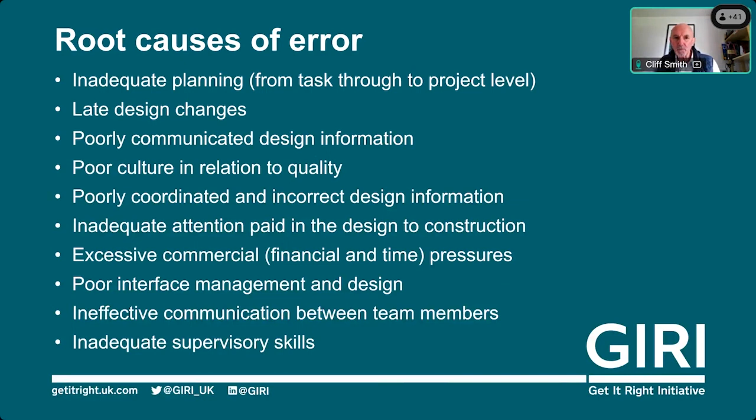GIRI was established following the original research as a not-for-profit membership-based organisation with the strategic aim of improving industry productivity through the elimination of error, and we became a limited company in 2017. The research demonstrated the link between error elimination and productivity, and this helped to convince businesses in the industry as to the benefits of investing in a zero-error program.

But the world is changing, and boardrooms are now recognising the broader range of imperatives they need to satisfy, including safety, sustainability and quality. An error-free strategy provides a platform for achieving all these objectives, and our strategic aim now reflects this.

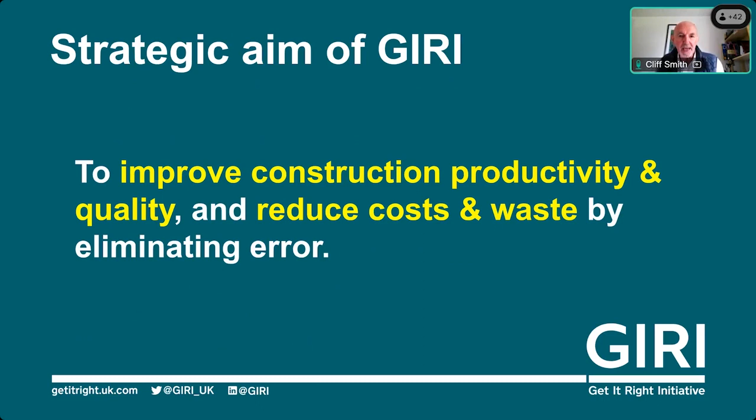So let's take a quick look at how GIRI is going about seeking to achieve its objective and the many benefits that such an approach brings. We have our thought leadership through training, campaigns such as our framework, and forums and webinars such as this. And then in terms of knowledge sharing, we have our research, much of which you'll find on our website, both in terms of design and technology. We are very active on social media, and we provide networking opportunities for our members through 4 meetings in London, usually per annum.

So what are the benefits? Well, productivity certainly is a big gain if you're not wasting time and money. Safety - research in Australia found that 37% of accidents occur during rework. So if you're not making errors, you've got a safer site. And in terms of sustainability, if we're not wasting, as I said before, then our carbon footprint is going to be better. I think the quality benefits are manifest if you get it right first time. And in terms of predictability, if we are not wasting that time, money, and effort, then our outcomes are more predictable. And overall, both as organisations, companies, and the industry as a whole will have a better reputation.

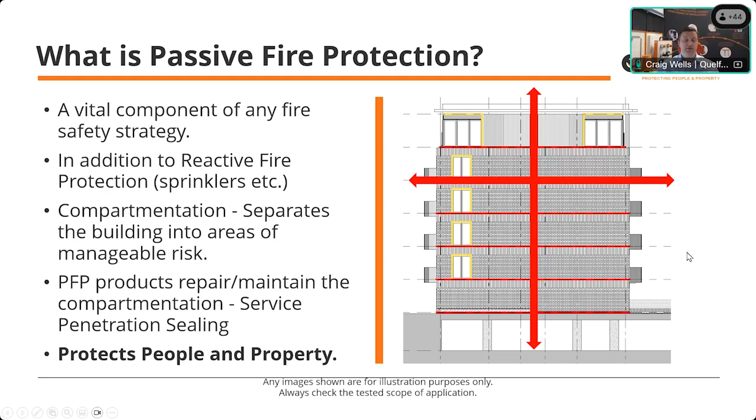So what we're talking about is really compartmentalizing the building and breaking the area down into areas of manageable risk. But of course, in order for that building to function, you're going to have necessary weaknesses within the compartmentation. By weaknesses, we mean things like windows, doors, but in the context of today, service penetration seals - so pipes, cables, and so on - necessary for the building to function, but ultimately breaching the compartmentation.

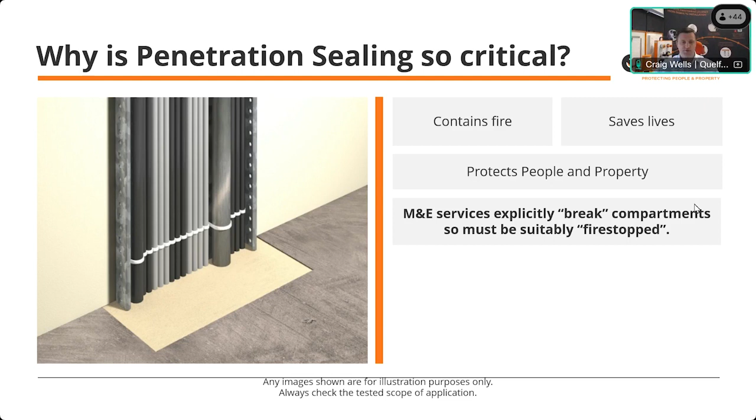So need to be suitably fire stopped. I'm not going to go through lots of pictures of how to get it wrong - we can go to social media for that. I'm going to touch on a couple of examples just to set the context. But this is very much about how you move forward from today, how you can get it right, and it does require, as we've said, a cultural change or a behaviour shift.

So a real reminder, really, that fires do happen. Let us not think that it won't happen, that it doesn't happen to us. Fires do happen, and we've had lots of high-profile cases in recent years.

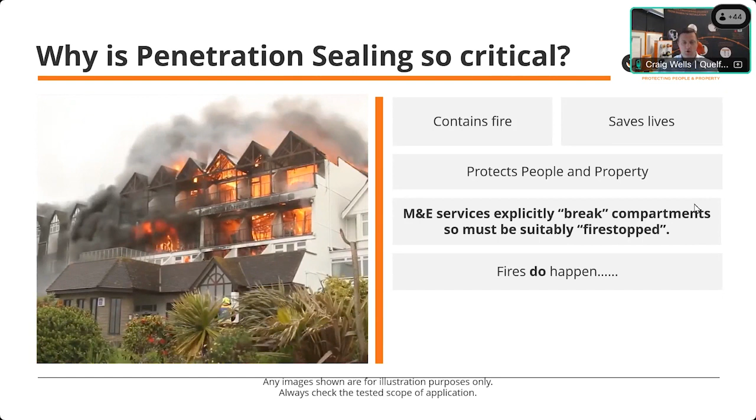But what we can see here is, should we say, a typical building fire, but ultimately we can see the fire spreading from one compartment to the next. Pretty scary stuff. But ultimately, the nice thing about this - if we install the correct products in the correct way, the fire can be contained to the compartment of origin for the prescribed period of time for which it's been tested.

So how do we arrive at that situation where we install the correct products in the correct way? That's what we'll be talking about today.

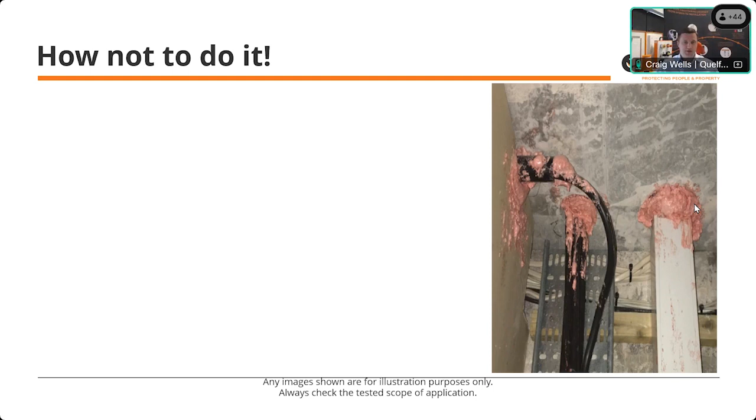It's not a case of one product squirted in, or building an opening in a fire rated wall, running all the services through, and then relying on a fire stopper to put some product in afterwards. Fire stoppers are only installers of tested systems. If they come to a situation with no consideration for fire stopping and tell you that you've got to make the aperture larger or move services, they're not being awkward. They're trying to install the product in accordance with the tested scope of application.

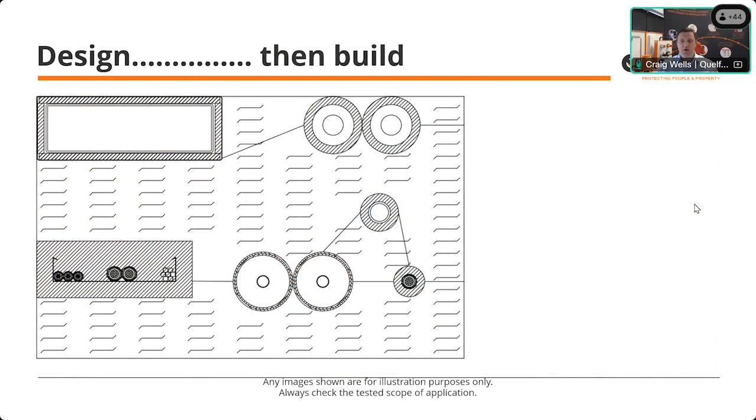So how do we get to that situation? It's a basic concept: design and then build, not build and then hope we can fit something in. So yes, identifying your services, designing it, spatial coordination, and then turning that into a real install.

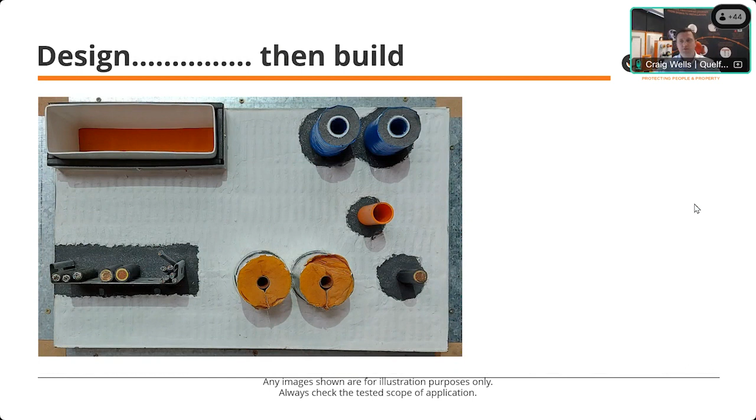So if we think about service penetration sealing, what do we mean? Often we talk about it being a batt and mastic seal. When we talk about culture change, behavior change, we actually need to start changing our language. It's not just a batt seal, it's a number of products. It might include a fire batt, but installed as a tested system. There might be wraps, collars, sleeves, different types of sealant, and batt and sealant as well. But it's a tested system.

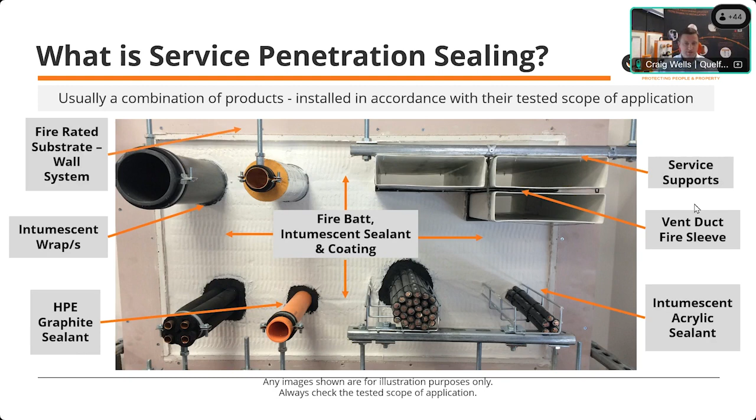And of course, the fire stopping itself is only as good as the substrate it's installed into. So it's relying, in this case, on the plasterboard, the dry lining. And of course, the services need to be adequately supported as well.

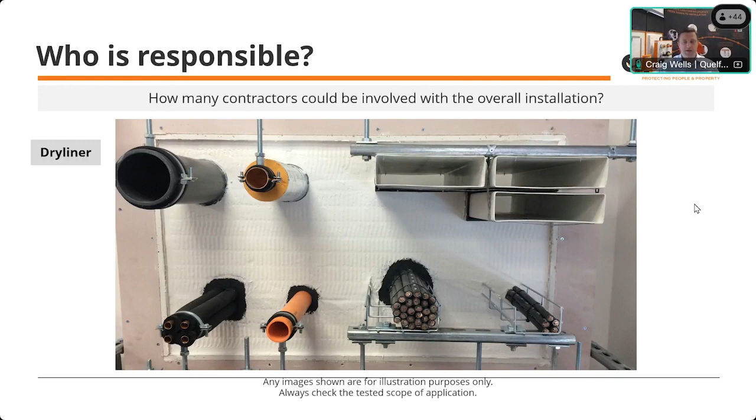In terms of who's responsible for this, you might say it's the fire stopper's problem at the end of the project. Yes, they take final responsibility, but there are a number of different trades that directly impact the overall performance of the seal: the dry lining, the creation of the aperture, the plumber, the electrician, the ventilation installer, the sprinkler installer, the lagger, and finally the fire stop contractor. But as I say, they are only an installer of a tested system.

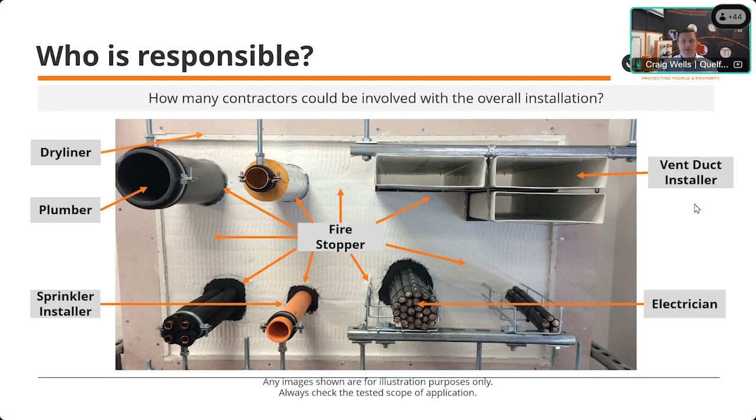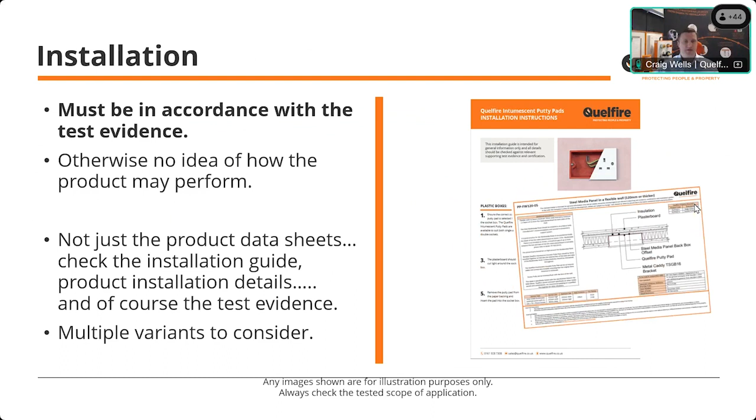So it's important that there is coordination and communication across all the trades to ensure they can install a tested system. Whilst it's tempting to just look at the glossy product data sheets and the flashy websites or the label on the can, it's very much about identifying the tested details, the standard installation details, which are based on the test evidence specific to your set of circumstances.

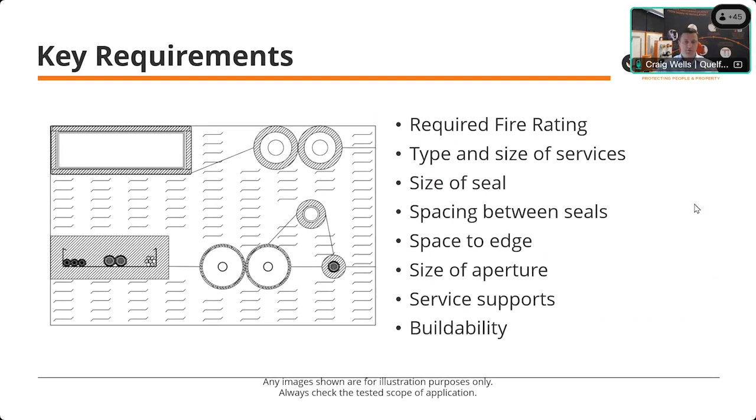So how do we arrive at that? Well, we'll talk that through. Ultimately, those standard details will have a number of key requirements within that tested scope, things like the fire rating that the detail provides, and then type, size, specification and spatial coordination, which we'll go on to in the next couple of slides.

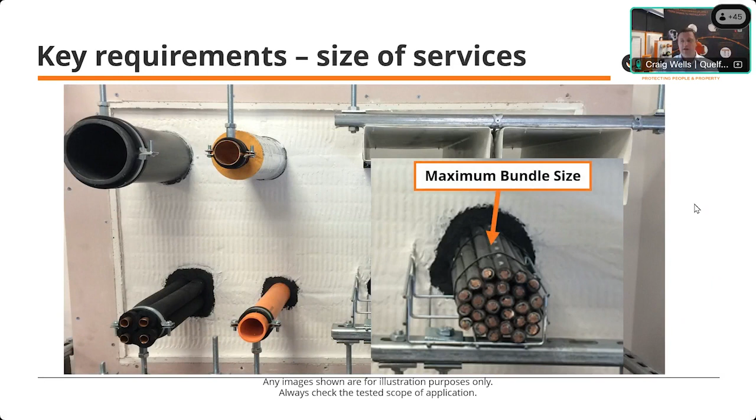Obviously there are limitations on the actual services themselves: the maximum size of bundles, the maximum diameter of pipes, the maximum thicknesses of insulation, and so on. So all these things need to be thought about.

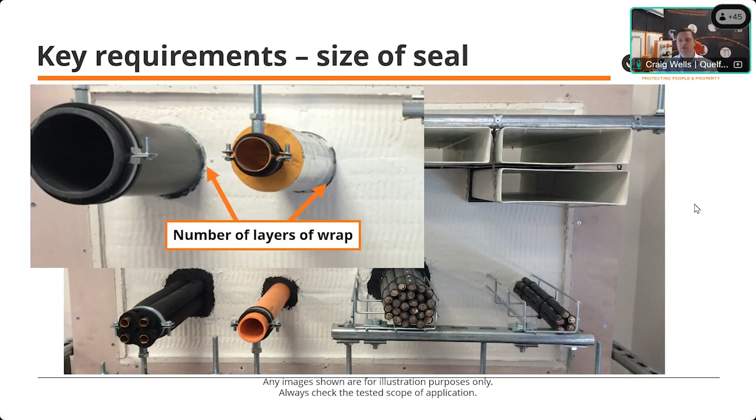And then the actual seal around those services will vary as well. There could be a different number of layers of wrap, might be 1, 2, 3, 6 layers. It could be that we're using a sealant. There might be a 10 mil annulus, a 20 mil annulus. When I say annulus, it's the size of the seal around the services.

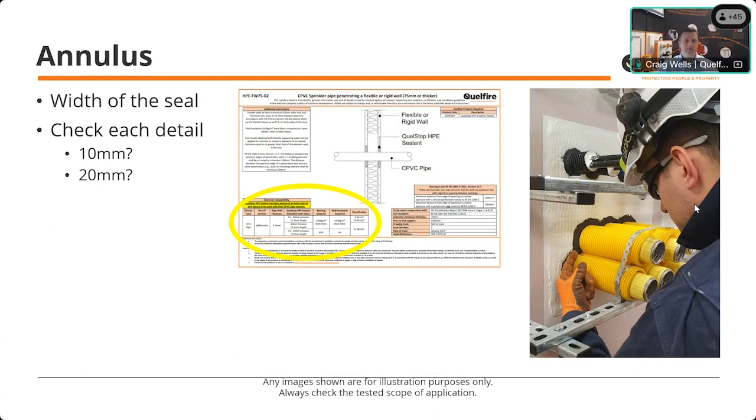So it's important we're looking at those specific standard installation details, based on test evidence, to identify whether the size of the service is covered and what size seal each of those services requires. There's an example of a standard installation detail, and there could be a range of sizes of seals. I appreciate it's a lot of information to take in one go, but I just want to set the scene of how complex it could be.

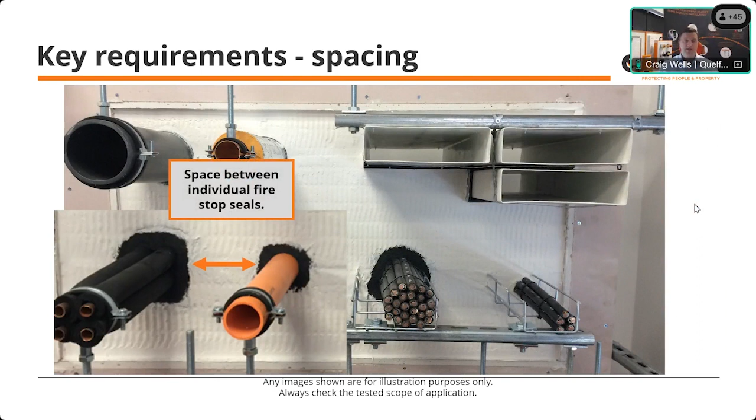One of the bigger, wider issues that often gets overlooked is spatial coordination - the space required between individual fire stop seals. BS EN 1366 part 3 says there should be 100 millimeters between each seal unless tested otherwise. So yes, you can have multiple services running through that hole in the wall, but you need enough space between them.

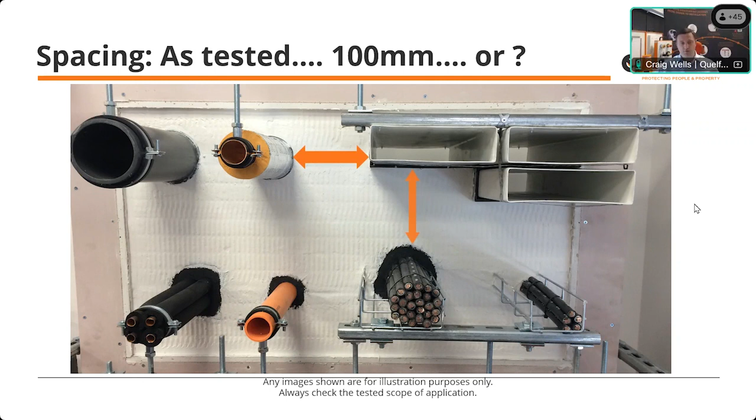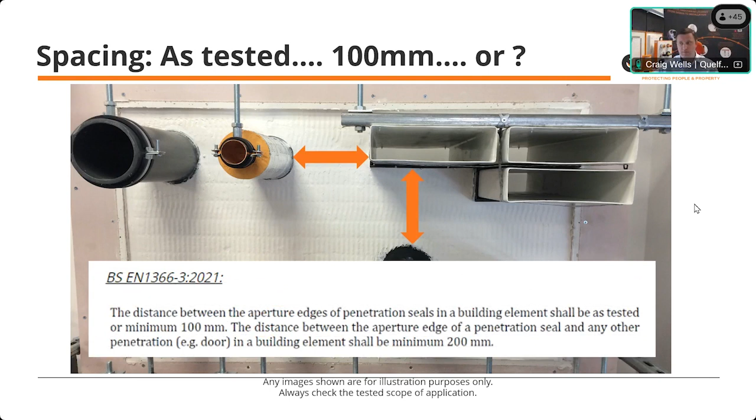Between the wrap and the sleeve, or the sleeve and the sealant, or the sealant and the sealant, 100 millimeters, or as tested. So again, it's about that scope of application, that tested scope to say, can we have it closer than 100 millimeters? Is it 50 mil? Is it 0 millimeters? It depends on the scope. So in this example here, between the actual wrap around the plastic pipe and the wrap around the insulation. Equally as important, the space that's required between the edge of the opening and the seals.

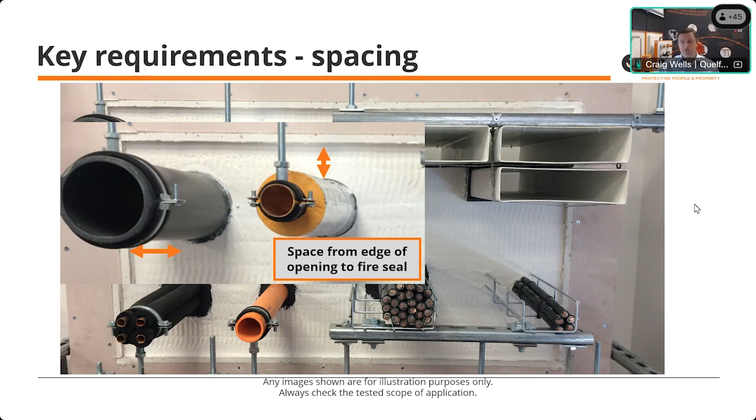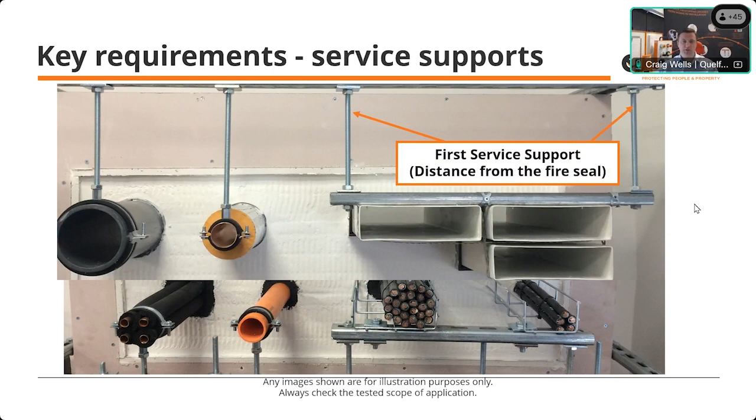And of course, the services themselves need to be adequately supported as well. There should be no imposed load on the fire stop seal. So these are all key things we need to be considering at an early stage, because the cost, the hassle and the inconvenience of going back in to put additional service supports, you want to be avoiding that at all costs.

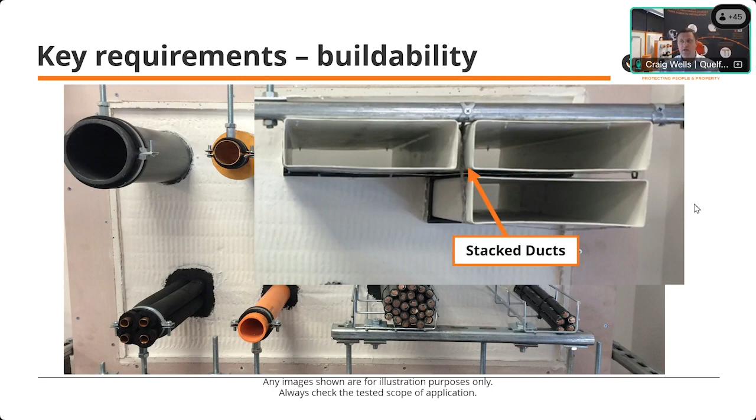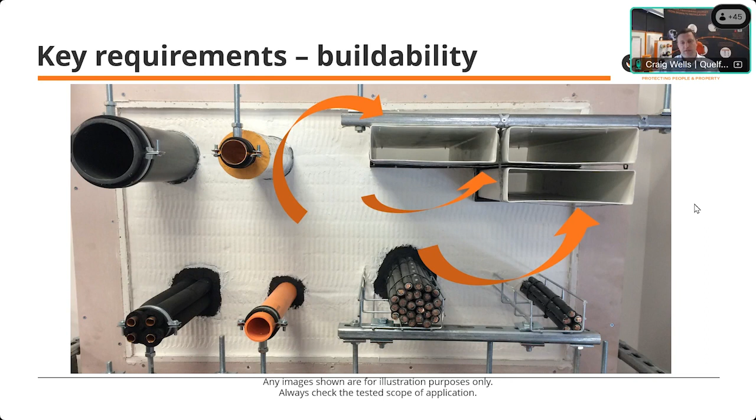And finally, we need to consider, is it practical? Is it actually buildable? So yes, this is an example of where certain fire sleeves have been tested with 0 millimeter between them, instead of 100 millimeter, which is all well and good. But what about from a practical aspect? If we install that fire sleeve tight to the edge of the opening and tight to each other, as we've got in this example, all well and good. But if we then suddenly decide to move them apart by 10 mil or 20 mil or 30 mil, we've then got to install batt and sealant into that gap. Can that be practically done? So all key considerations at an early stage.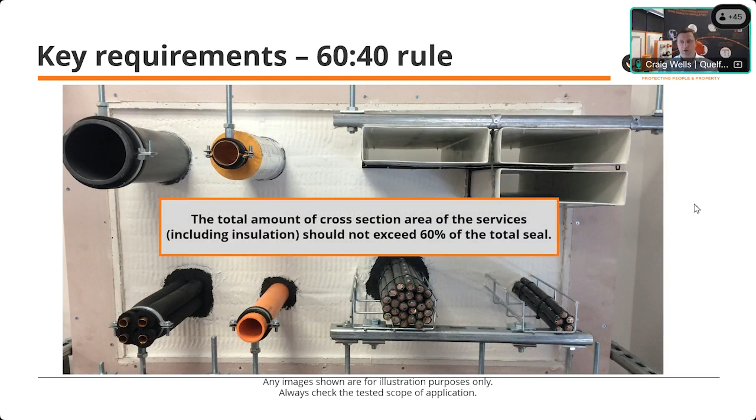A good guidance rule, the 60-40 rule, is that the services and any required insulation should not exceed 60% of the overall seal. That way you've generally got enough space. But the bottom line is the test evidence, that tested scope of application of the product or system. So as we've said, definitely not a case of a one-shot wonder. Neither is it a case of saying, well, we'll just create a hole in a wall, run everything through and hope it can be fire stopped.

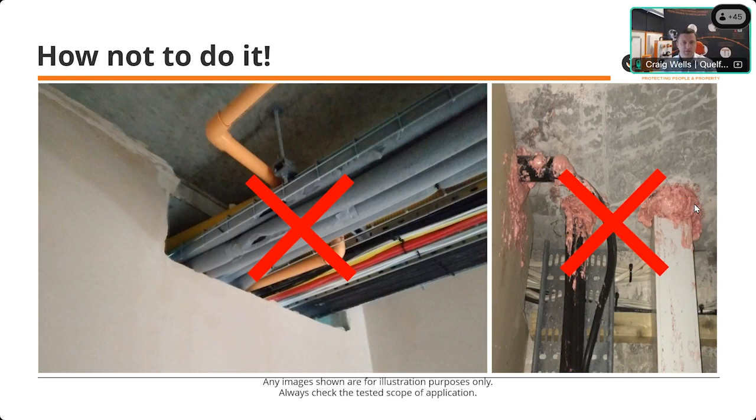We need to be approaching this differently. We need to be engaging early and identifying suitably tested solutions for the application. I want to use this particular wall. I want to use this pipe, this insulation. I need to achieve this particular fire rating. Is there a tested detail available? What is the tested scope of application of that detail? Where do I need to position services to suit? And then we can go on and build.

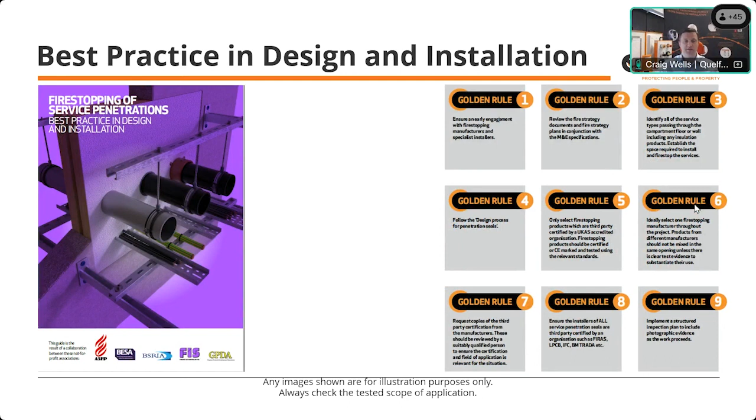So many may be familiar with this best practice guide, a very comprehensive document put together by a number of the trade associations. It has 9 golden rules in it. And when you stop and look at this, bearing in mind this is a best practice design and installation guide, what you'll see is that 7 of those golden rules relate to design. Now, as I said earlier, we would tend to think of fire stopping as the fire stopper's problem - they come in at the end of the job, lower value package, maybe later on in the program. However, this focus, 7 out of 9 golden rules, really goes to show where the emphasis and where the time and resource needs to be.

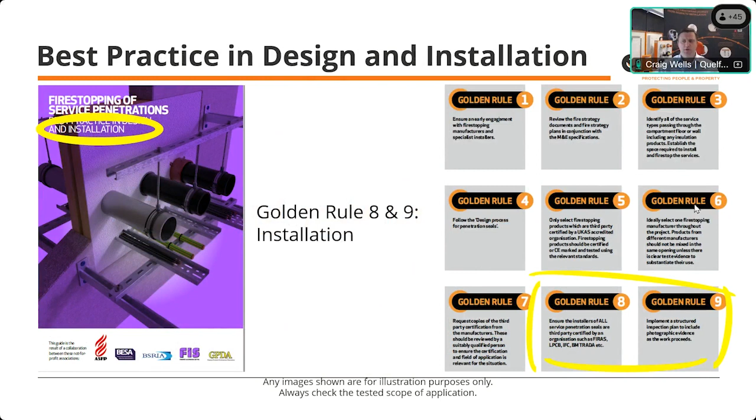It's in the design phase, and then the installation becomes much more achievable. And of course, with that comes all the benefits of keeping to program and cost benefits, etc. So not to discount any of the golden rules at all, they're all equally important, but golden rule 1 talks about an early engagement process, and golden rule 4 talks about following a design process. So again, just emphasizing that we can't just wing it and hope for the best. We need to be planning this properly in order to get it right.

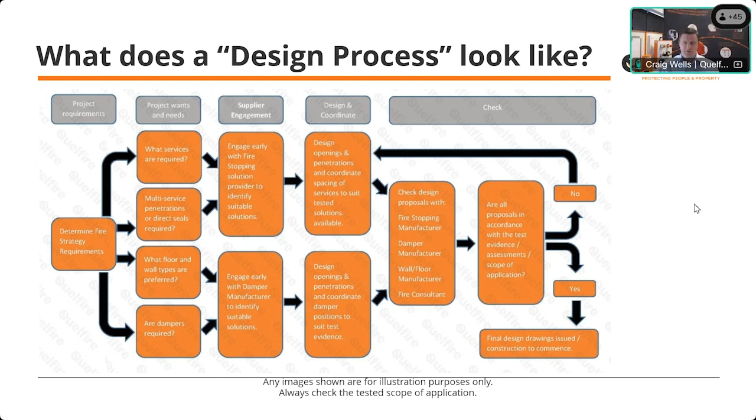So we'll talk through what a design process can look like over the next couple of slides. This is simplified into a bit of a flow chart, and we'll have that as a handout following the presentation. But really, it starts with that early engagement meeting, bringing together all those relevant parties that we've mentioned previously onto the same page, in the same room, talking about a common goal.

Remembering passive fire protection, what are we doing? We're protecting people and property, ultimately saving lives. So bringing everyone together onto the same page to discuss the project requirements, and of course, to get an understanding of what you don't know.

So often these other trades, plumbers, electricians and so on, that aren't directly involved with installation, don't necessarily fully understand the complications of what their actions could be. So there is never too soon to engage and get educated as to why we need to do what we need to do. Of course, if we know some specifics, we can start looking at those specific installation details, but it may be too early.

So how do we approach it? What does a design process look like? We need to start identifying the wants and the needs.

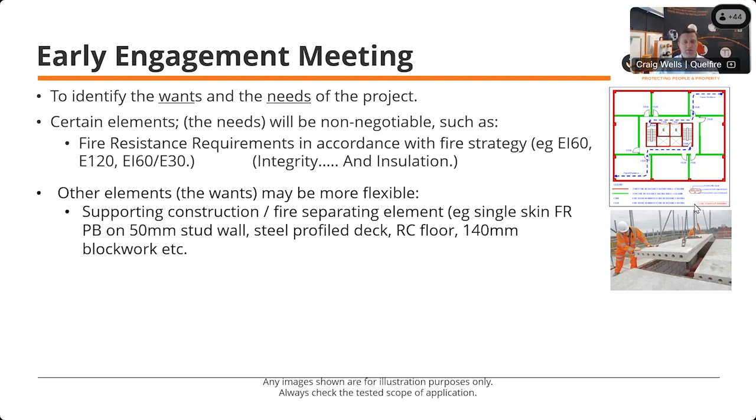There's going to be certain things which are non-negotiable, your fire ratings. It's important to be clear here about integrity and insulation ratings, as determined in the fire strategy. That's what you've got to aim for, and then there may be other elements which may need to be slightly more flexible. You might want to use a particular wall, service, or insulation, but if there isn't a tested solution available for that combination of products, then maybe we need to be making some compromises. You certainly want to make those compromises, those changes, at design stage, rather than once you've started installing halfway through a project.

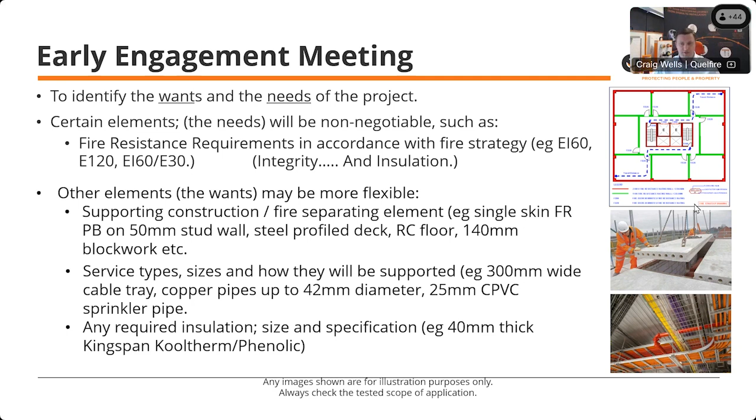So conversation at an early stage about those sorts of things, and then of course as to how you want to create those penetrations. Some people might say, well, we're going to put everything through letterboxes, great - a typical example we've been looking at through the presentation already. Others might say, well, we want to limit it and have individual penetrations, or what we call direct seals. Again, potentially solutions for that.

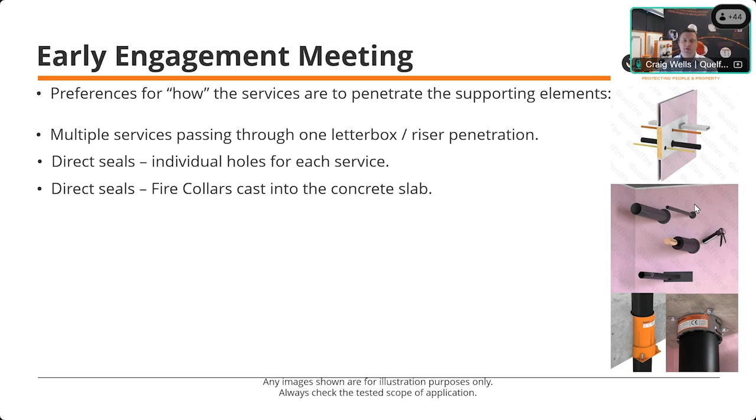When it comes to floors, some people prefer to cast in fire collars. Others prefer to have a diamond drilled hole, or leave a larger aperture which would then need backfilling with the fire protection compound. These are all great conversations to be having at an early stage as to how you want to do things. But then the question is: is there a tested solution which matches your wants and your needs?

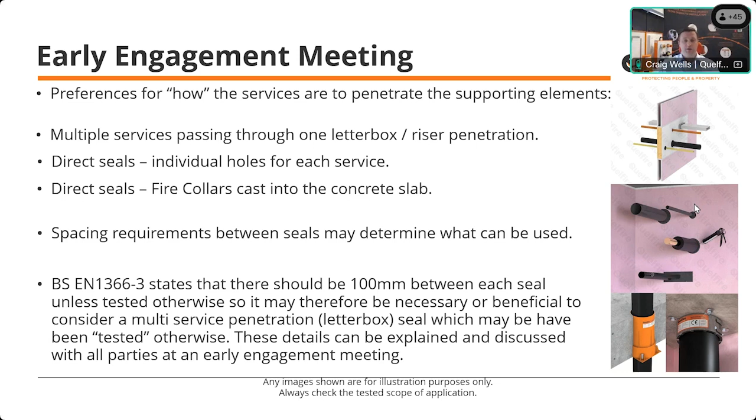Now, one of the things that may dictate what you can do is the spacing requirements - an often overlooked area. Ultimately, you need 100 millimeters between each seal, unless tested otherwise. Again, great conversations to be having at an early stage. You might want to use a direct seal, but it may be necessary to do a multi-service penetration seal in order to achieve the spatial requirements on the project.

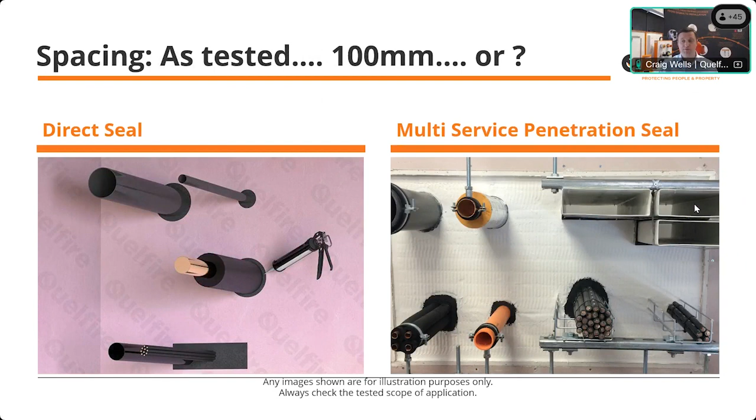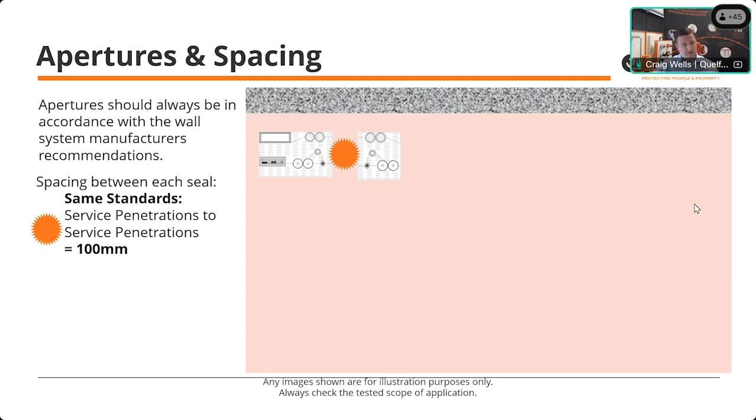The other complication is where we've got multiple apertures. Not wanting to go into too much detail, but it is necessary to touch on it. If we've got multiple letterboxes, the spacing within the letterbox will be as per the tested scope. Then 1366 part 3 is saying you need 100 millimeters between the seals, again unless tested otherwise. And indeed some wall manufacturers may insist you need 200 millimeters, or 310, or 330, or full studs. So again, things to be thought about at an early stage.

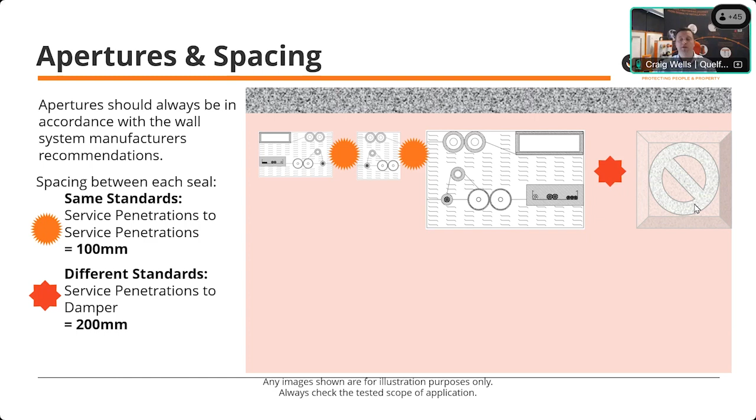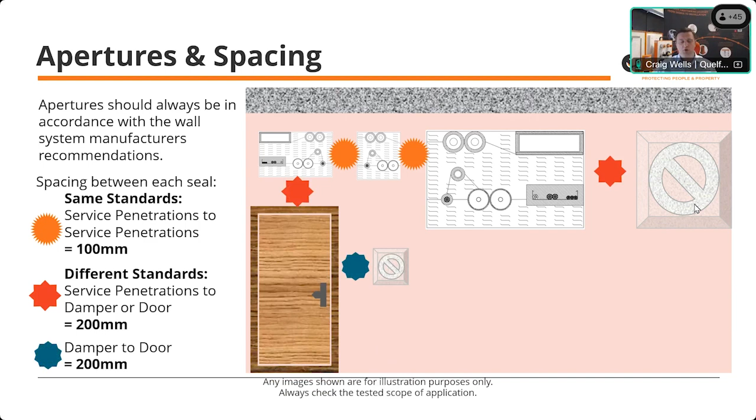And then if we've got services or other things tested to other standards, the requirements are that you need 200 millimeters between them. So if we put a duct or a damper in the same wall, we need 200 millimeters between the opening around the pipes and cables, which is what we're talking about today, and the duct or damper. The same would apply to things like a door, which is tested to a different standard and requires the 200 millimeters, and of course doors to ducts and dampers as well. So all these key things need thinking about at design stage in order to, A, achieve compliance, but of course, B, to avoid complicated and expensive rework.

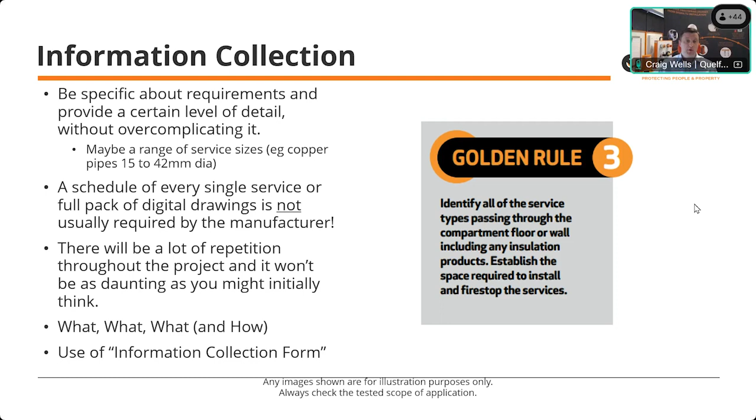So how do we collect all that information? It's important that we are specific about services and installations - 22 mil heating pipe, is it plastic, is it copper, is it insulated, what's it insulated with, all these things. And yes, it can seem daunting to think, well, how are we going to collect all this information, we've got 10,000 penetrations on our project. You will have a lot of repetition, an awful lot of repetition. Once you start looking at it, you'll find it's not as daunting as you think. But ultimately there are four questions, and we call this the what, what, what, and how. We have an example here of an information collection form, which helps you to condense that information at an early stage to identify suitable details.

So the first question is, what substrate do we have? What are we actually going through? Is it a single skin wall, double skin wall, hollow core floor, etc.? And then, of course, what fire rating, and importantly, integrity and insulation here.

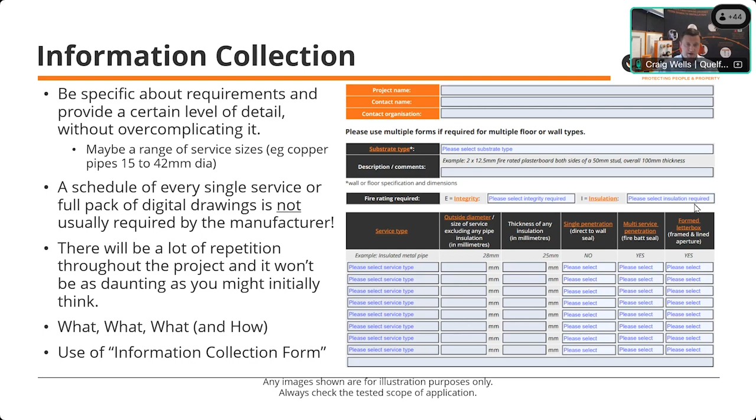And then what services do we have? Is it copper pipe, is it plastic, what's it insulated with? And then the fourth one, the how - how do you want to penetrate? Is it through a direct seal, or is it a multi-service letterbox?

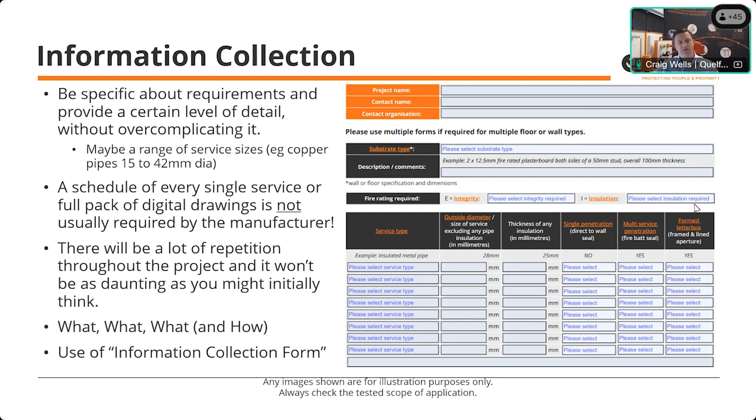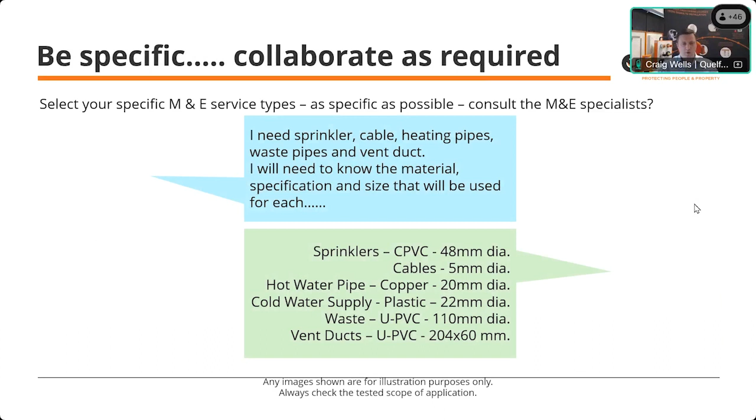Once you've got that information, you can then identify the standard details. However, you may need to go out to various members of the supply chain and your contractors to get that specific information - what wall is intended, what pipe is intended. So being very clear about what we're trying to do, and then from there we can match up those standard installation details, which are based on test evidence.

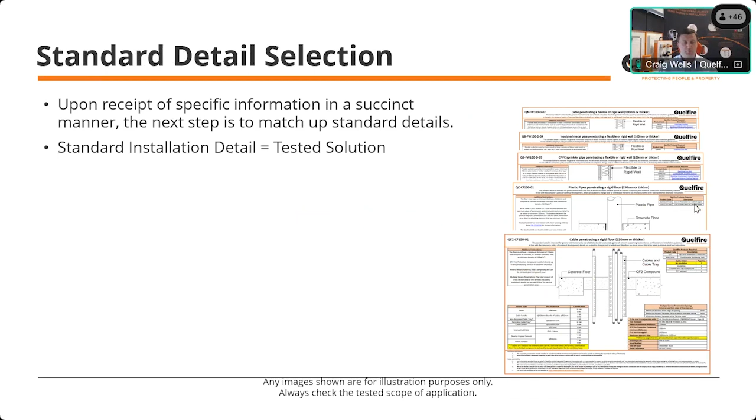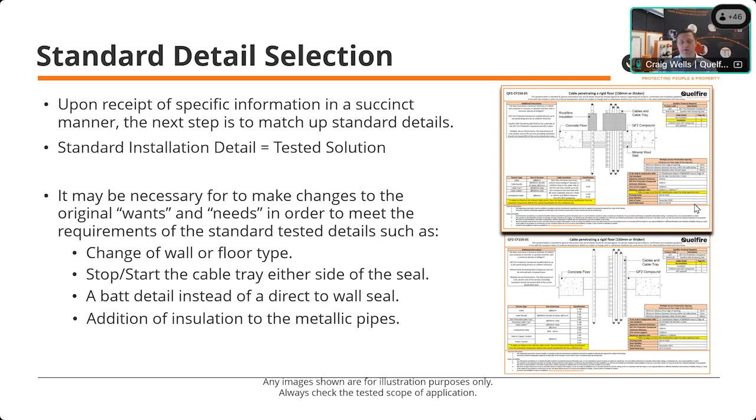And of course the benefits of looking at this at an early stage are that if any compromises or changes need to be made, that can be done at the design stage before we start installing. So it may be necessary to start a cable tray - or, in this example, we have a cable tray running through a compound seal achieving a particular fire rating. To achieve another higher fire rating or insulation rating, it may be necessary to wrap insulation around those services. These are all good conversations to be having at an early stage, so that we're ready to build.

So ultimately, once you've identified all those standard installation details, you've got to bring them together in a workable drawing. That means reading the information on those specific details. And yes, there's a lot of information to take in, but once you get into it, you'll see there's a very consistent layout, and it all starts to become a little bit more meaningful.

But ultimately these drawings, as I say, are based on test evidence, so you can see there the hyperlink for the UL classification report. The first service support requirement, in this case within 400 millimeters of the wall, the types of services - cables, bundles, baskets, trays, etc. - and of course the corresponding maximum sizes of those services for this particular detail, and importantly the fire rating that achieves, and the spacing requirements.

So we have an example here, 0-50 mil, meaning the seal can be 0 to edge, 0 to a seal of the same type, and 50 millimeters to a seal around a different service type. So we start combining all that information into a drawing, taking into consideration the size of the seal - in this case a 20 millimeter annulus of sealant - list of the products that are required, information about the wall or substrate, and of course maximum aperture sizes as well.

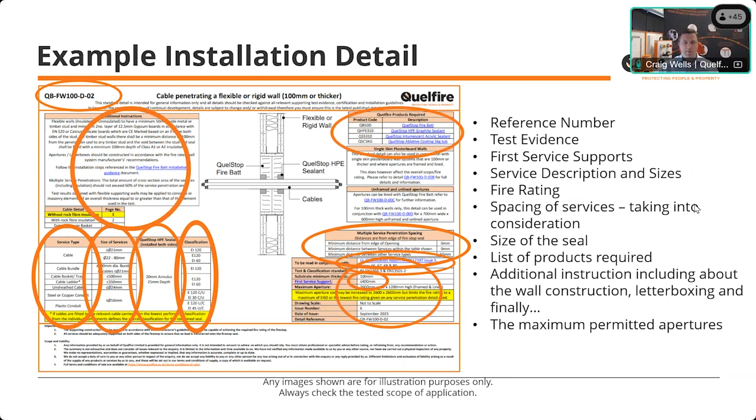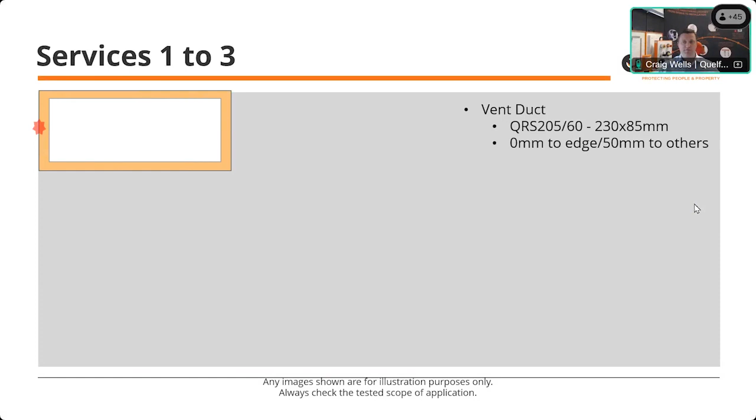As I say, we start combining the information from those multiple details for multiple services into a workable drawing. And it's very much just a case of plodding through, working through each of the services, the size of the seal, the space that's required.

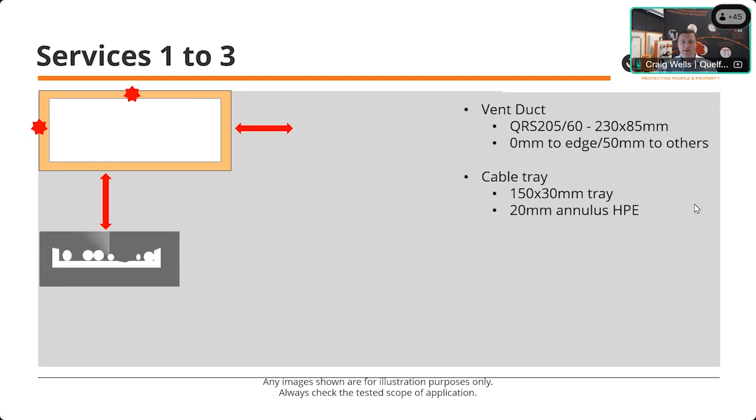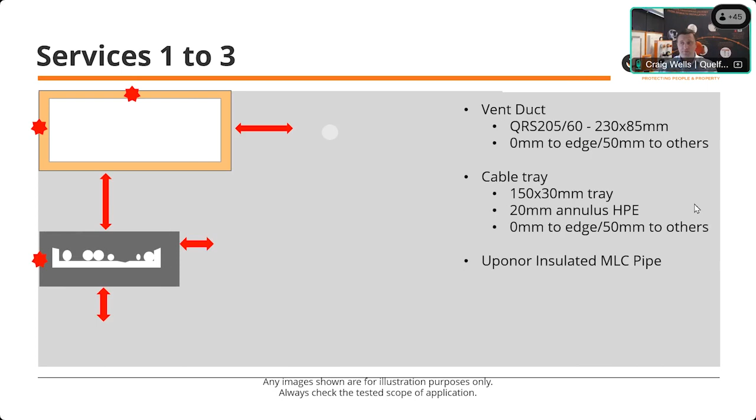So in this case, we have a plastic vent duct. We know the size of the sleeve, we know we need 50 millimeter spacing. We've then got a cable tray, which is going to have a 20 millimeter annulus of sealant around it. Because we know the size of the sleeve, plus the 50 mil, plus the 20 millimeter annulus, we now know where that tray can be in relation to the duct. And we just carry on through all the other remaining services.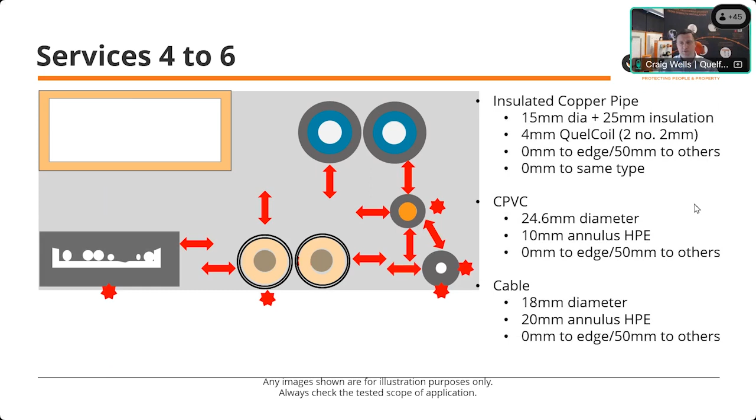And from there we can then determine what the size of the aperture needs to be in the wall. So you can see this is very much the opposite way around to how we might have approached things historically - if historically we'd just stick a 300 by 200 mil aperture in that wall, and you kind of hope the services can fit in, and you hope the fire stopper can install the fire stopping in accordance with the test evidence. So as I say, it does require a change of thinking, change of process.

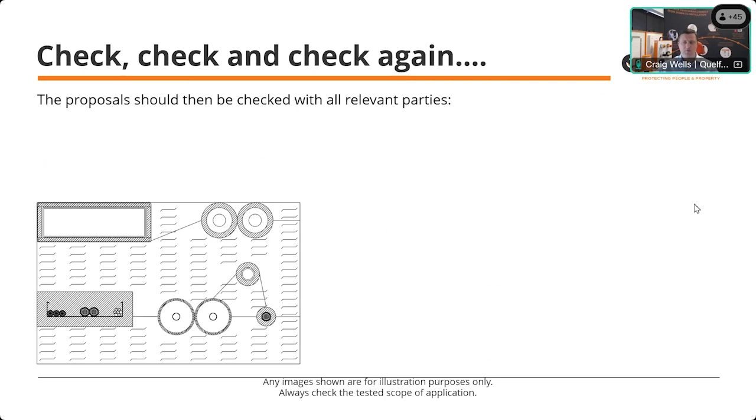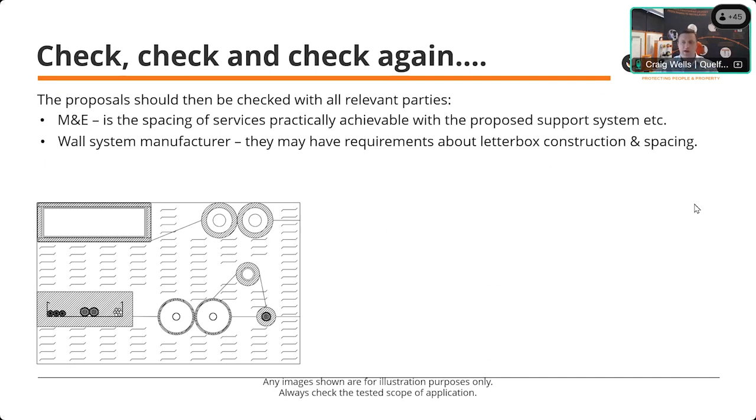It requires that early engagement and attention to detail. And then, of course, it's important to go out and check the proposals with all the relevant people. M&E contractor - is it possible to install the services in this way? Wall system manufacturer - are you happy with the aperture this size? It's all very well Quelfire saying 2.6 by 2.6 meters, but is the wall system capable of that? Fire stop contractor - can it be practically installed?

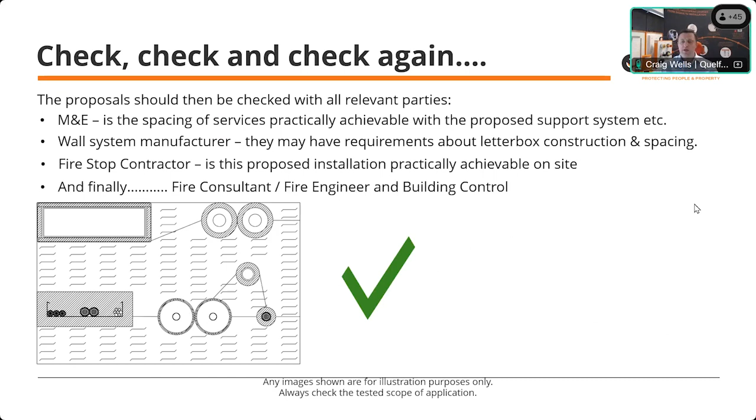And of course, finally, fire consultant, fire engineer, etc., giving you that approval. And if everyone's happy, then and only then do we commence to the build phase.

Not going to say an awful lot on installation, because a lot of the hard work during design makes the installation become much more achievable. But yes, the use of competent contractors.

What does that mean? I know it's a buzzword, but we use it an awful lot. Of course, the use of third-party accredited installers is a way of ensuring that the products are installed to the correct standard. And indeed, Approved Document B suggests that the use of a third-party accredited contractor can provide a level of confidence about the installation.

Obviously there will be certain products which probably don't lend themselves to being installed by a third-party accredited installer, things like putty pads in electric socket boxes, where the electrician should do it. So a way of ensuring products are installed in accordance with those tested details is to arrange manufacturer-specific installation training.

And then the age-old thing of quality control, the use of sample boards and benchmarking. We've done it for years, but maybe we haven't done it for years. So I would strongly encourage anyone to be putting those designs into reality with the use of a sample board, so that it becomes a collaborative piece that all relevant installation contractors can gather around and see what is expected of each of them. So turn that design into reality.

So hopefully that gives you some thoughts about the installation. But as I say, passive fire protection is very complex, but ultimately it does save lives. It needs to be taken seriously, and we need to bear in mind all these complexities of the tested scope of application of the system, things like the size of the seal and the spacing that we've touched on.

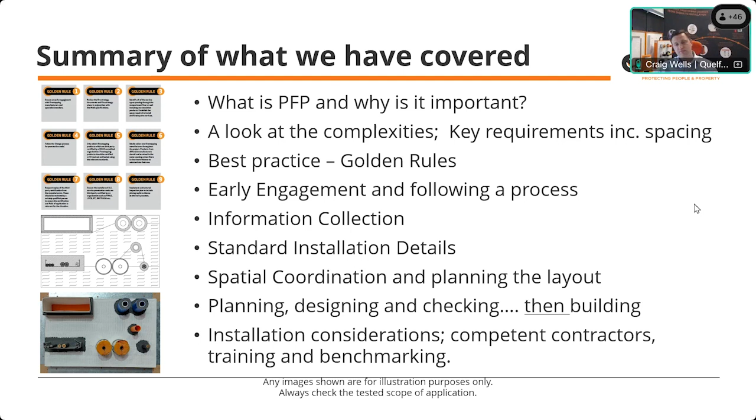So if you haven't had a look at that best practice guide, definitely a bit of bedtime reading there. As I say, 9 golden rules, 7 in relation to design. And it does require that early engagement, attention to detail, following a process, following up, making sure we've got the specific relevant information to identify those standard installation details, which are of course based on test evidence, and then planning the services layout in accordance with that scope, checking with all the relevant parties, and delivering on that when we come to the installation phase.

So I'm just going to wrap up by playing a little video, because we just launched this campaign here at Quelfire, just to stress the importance of test evidence. And yes, it is complex, but there are solutions available, and we have to remember that this does save lives.

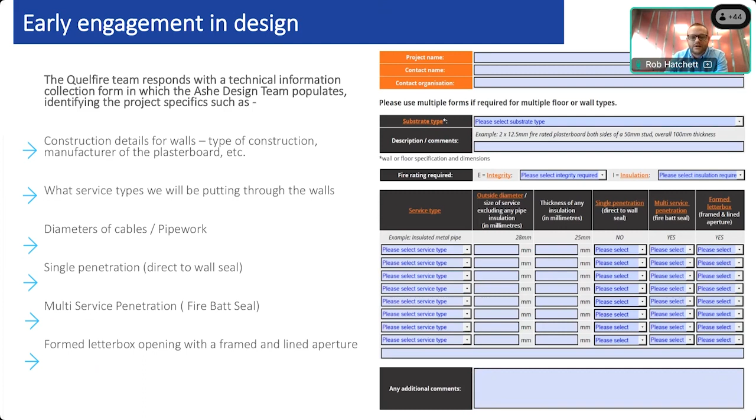be used, whether it be a single penetration direct to wall seal, or whether it's a multi-service penetration fire batt seal, or ideally a formed letterbox opening with a framed and lined aperture. It also has a comment box should you need to put anything in there.

The Quelfire team will also send over the Quail Selector, which is a standard installation detail selector tool as a handy PDF guide that you can keep on your laptop with all details readily available.

This document is broken down by substrate construction and then by penetrating services, so it is easy to navigate. This is a great tool for our design teams and site project managers, as it's a quick and easy way of identifying a tested passive fire stopping detail should they require one.

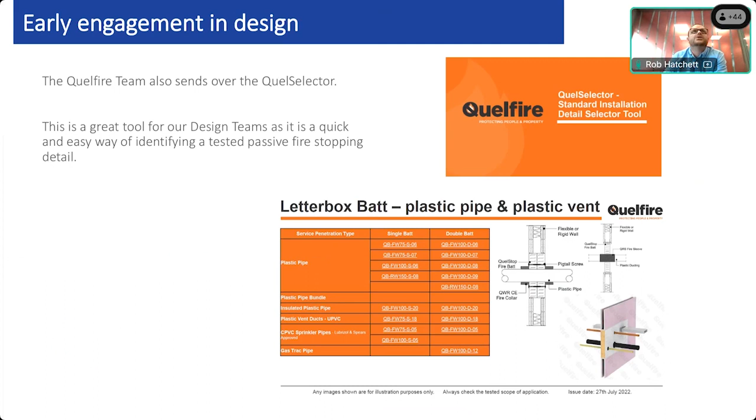Once the technical team at Quelfire have reviewed the key considerations in the technical information collection form given by our designer, a team's meeting then takes place to discuss the provided technical information.

It's discussed collaboratively that specific details can be used for single skin walls, double skin and blockwork walls, but for single skin walls, different details are used in conjunction with other details, which is where it gets complicated.

So, for cables, cable bundles, cable baskets, cable trays and cable ladders in a double skin wall build-up, we would refer to detail QB-FW100-D-01 as shown on the slide.

This detail dictates that the first service support is required to be under 400mm both sides of the opening, and then the next service support be it as per any other manufacturer's recommendation for the application. The minimum distance from the edge of the fire stop seal to the edge of the aperture can be 0mm.

The minimum distance from the edge of the fire stop seal to a service penetration of the same type is 0 mm, but the minimum distance from the edge of the fire stop seal to a service penetration of a different type should be 50 mm.

A common issue we've found with our supply chain—not so much now due to supply chain workshops and upskilling our workforce—is knowledge of the specific requirements of the fire service supports. It is imperative that the service supports are installed as per the detail, as this is how Quelfire have tested that application. If the service supports are not fitted as per the detail, in the event of a fire situation, the seal will not be compliant to the tested data.

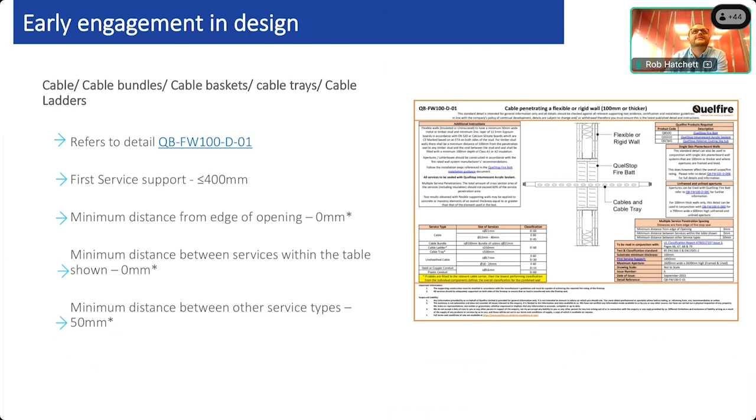This information can be taken on board by our design team, and a robust project-specific design can be composed. Incorporating passive fire stopping information into our projects due to early engagement offers a multitude of benefits that positively impact the integrity, safety, and efficiency of our projects.

As mentioned before, early engagement allows us to identify and address potential fire hazards and risks upfront, ensuring that our design prioritises the safety of the building occupants and its first responders. By implementing a robust passive fire stopping solution, we create a protective barrier that helps contain fire and smoke, mitigating the spread of flames and reducing the risk of injury or loss of life, if required, building protection.

We can also ensure compliance by collaborating with our fire safety experts and passive fire stopping specialists early on. We can ensure that our design meets all relevant building codes, regulations and standards related to fire protection. This proactive approach minimises the risk of compliance issues arising through the construction phase, avoiding costly delays and rework.

We can also keep the QSs happy by minimising costs by addressing passive fire stopping requirements early in the design phase. We can identify cost-effective solutions that deliver optimal fire protection without exceeding budgetary constraints. This proactive cost management approach helps minimise unexpected expenses associated with retrofitting or remedial work later in the project lifecycle.

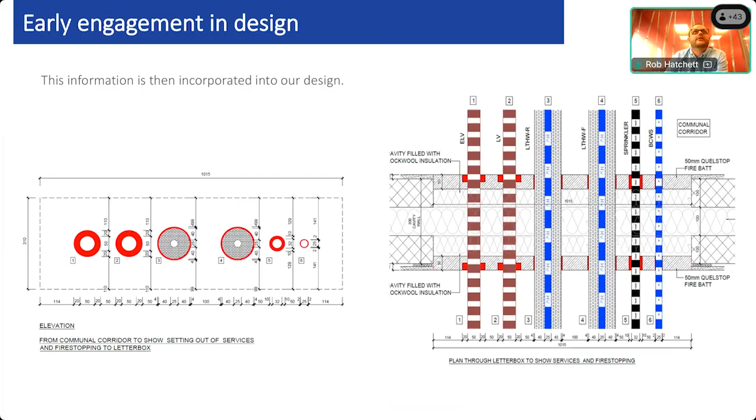In summary, incorporating design due to early engagement offers a range of benefits, including enhanced safety, regulatory compliance, efficiency, aesthetics, and cost effectiveness. By prioritising fire protection from the outset, we lay the groundwork for a resilient, high-performance building that meets the needs of both its occupants and its clients.

Thank you very much.